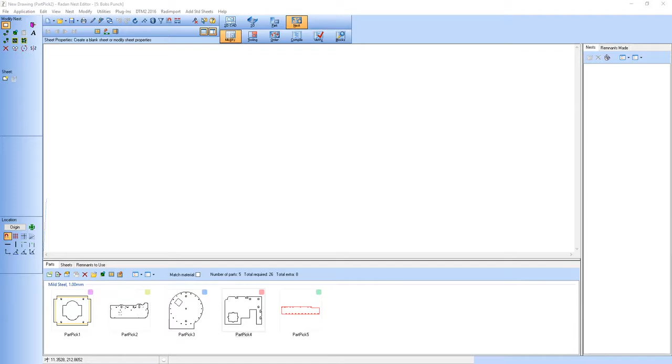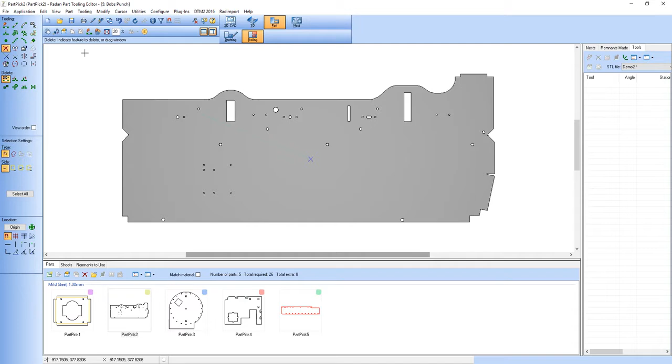So here you can see a Radan nest project, and I've got some components here that I want to nest. Now before I do this, I'm going to actually apply some tooling to these parts. So in the part editor, and using Radan's auto tooling, I will apply appropriate tools for this component. You'll see that I'm deselecting the tag option in auto tooling, because if I'm going to pick a part, I do not want it to be tagged into my sheet.

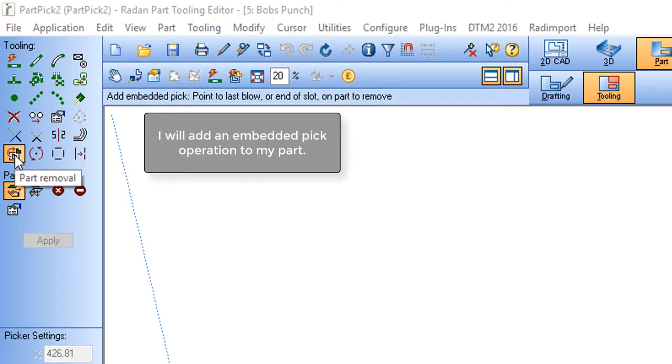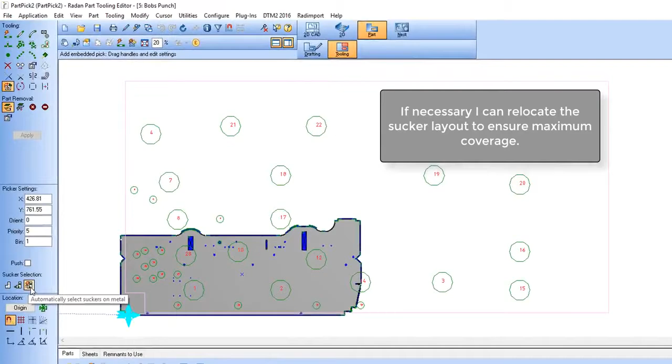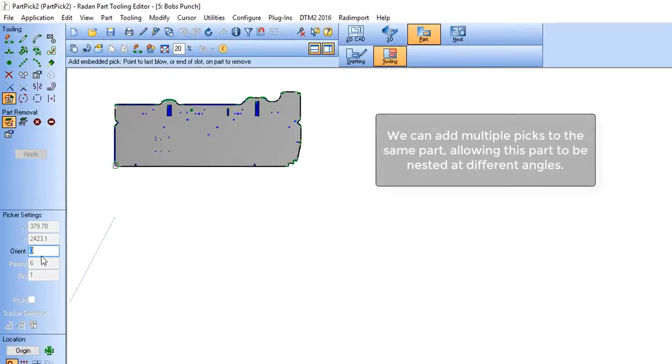If I wish to nest this part in different orientations, I can add multiple picks to my part and simply change the orientation of the suckers. So here you see I've rotated through 90. Again, I can get the software to automatically select the suckers over the surface of the material.

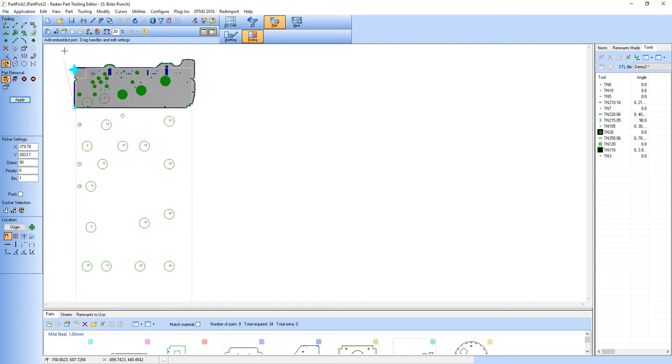Here on a different component, I'm going to show you that you can interactively select the suckers rather than have it done automatically. So all you need to do is select the suckers that you wish to activate. Selecting them a second time will deactivate that particular sucker.

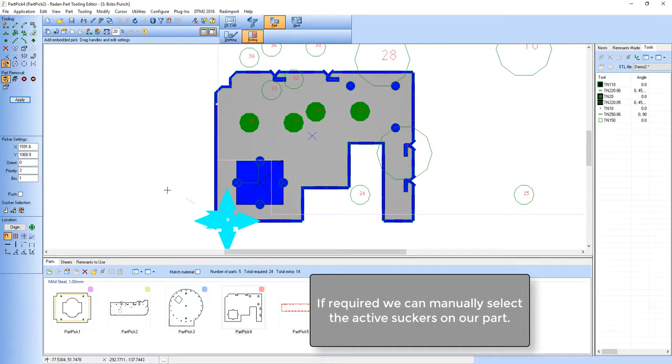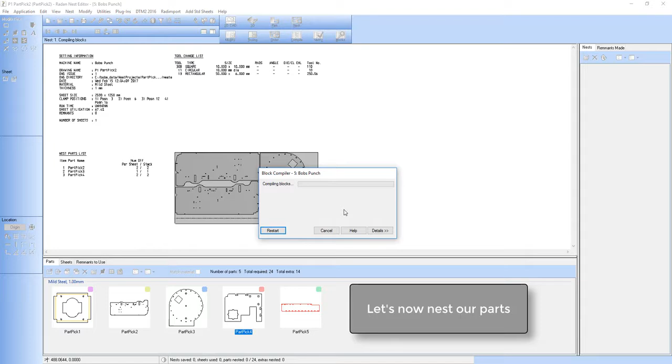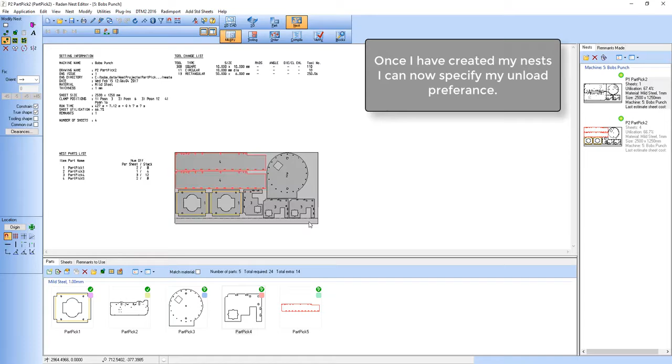Right, I'm going to now nest my components, and in my nest options I've set it to auto compile these programs. Here's my first nest completed and my second. Okay, once I have completed my nests, I can go into order mode and specify my unload options. And you can see here in the order menu under unload, I've got 3 options on how to unload my parts. In this case, I'm going to use semi-automatic.

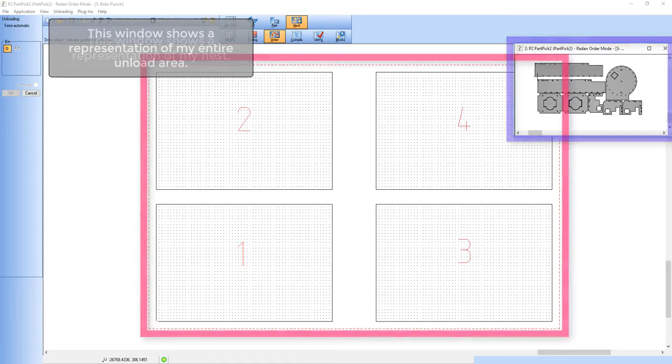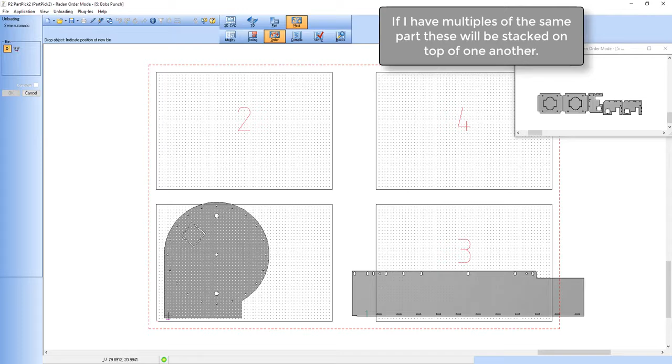So here you see a representation of my nest. This red area shows a representation of my entire unload area. And on this particular unload area I've got 4 separate pallet locations. I will now be offered each part in turn, and I can simply click it down where I want it to be unloaded to. Now if I've got multiples of one component, they will be unloaded on top of one another until I reach my maximum stack height, which is from my unload preferences.

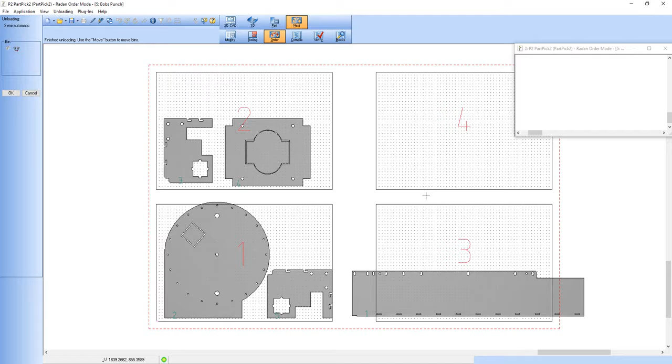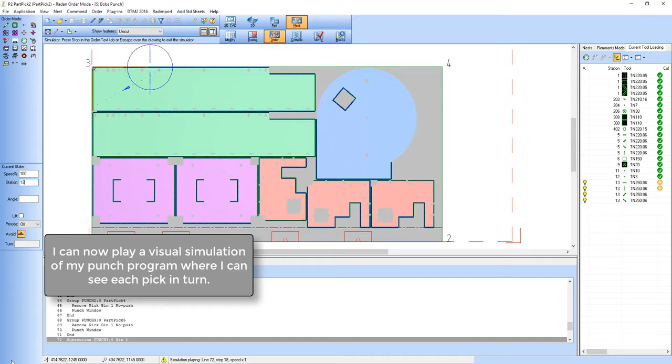Right, having completed my unload operation, I can return to order mode. I can now play a visual simulation of my punch program showing the actual unload operations as they happen. So the slitting is completed, and there's my first unload op, my second. So on completion of the slitting, the parts will be unloaded to the appropriate area.

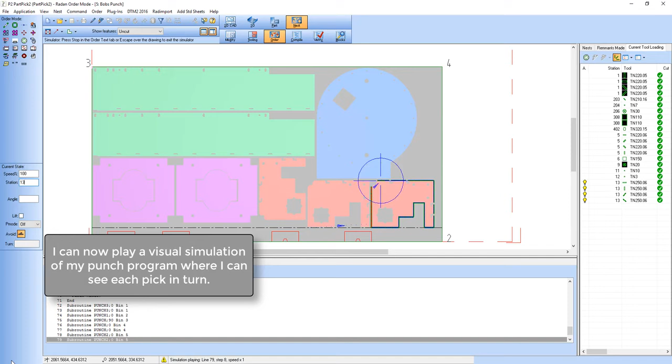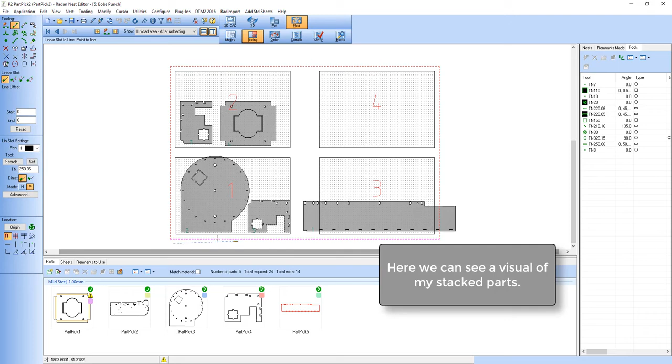Now back in tooling, I can go to the show option and display the unload area after unloading has taken place. And here you can see a visual representation of my unload area with my parts stacked. And here we have a parts list of those components that I've unloaded with the quantities and the stack height. So there you have part picking from Radan.